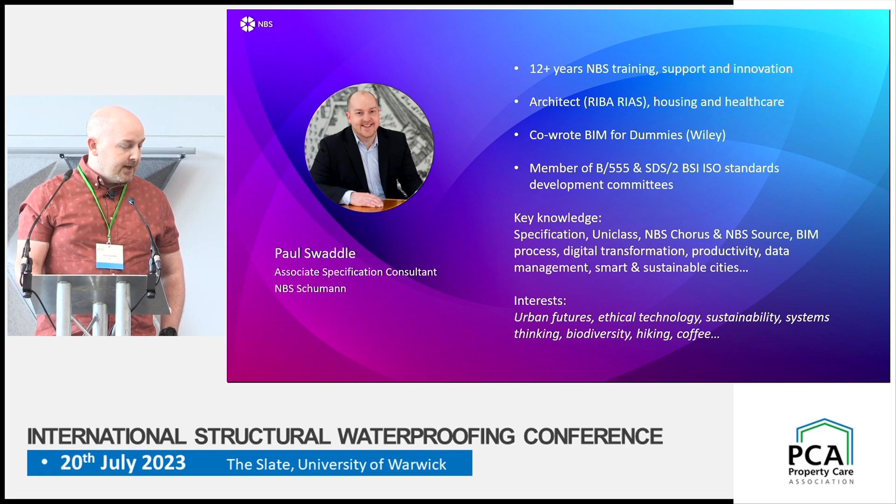It's funny being talked about as an authority or an expert on anything - I always think of it as experience. It's good to have lots of experience under your belt and lots of case studies that you can call on. Certainly not assuming that you know NBS. Oh, forgive me, there we go - certainly not assuming that you do know who NBS are.

We're a technology platform for the construction industry. Many of you will have used NBS specs in the past, J40, J10 type specs - they're created in NBS, but we provide platforms for thousands of users to find product data and specify buildings in all kinds of different ways. In terms of content, it's then access to standards and guidance, and we've got technical authors who work for us who are experts in their field. Recently, we became part of a Swedish headquartered group called Byggfakta, which gives us the scope and resources to develop Uniclass and NBS and continue to invest in those pieces of work.

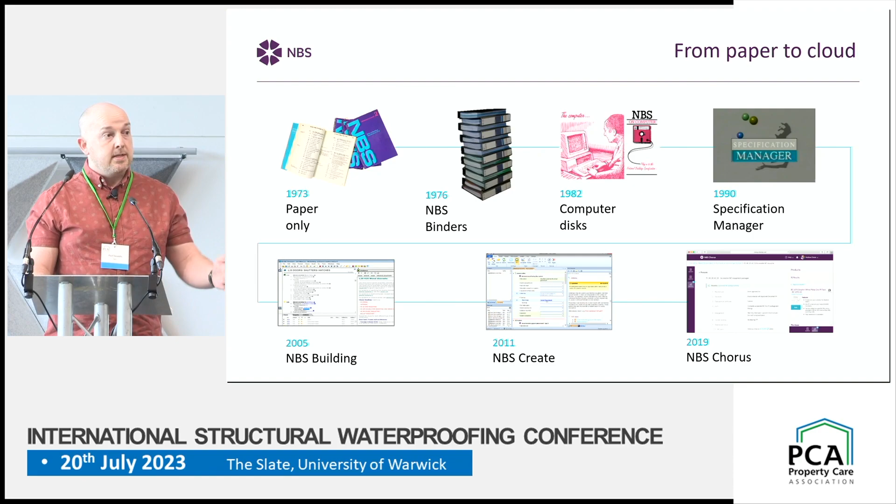So it's our 50-year anniversary. Back in 1973, NBS was first produced as a paper document, and everything since then really has been a technological evolution, responding to photocopiers, desktop computing, web technologies, and now into the cloud with NBS Chorus.

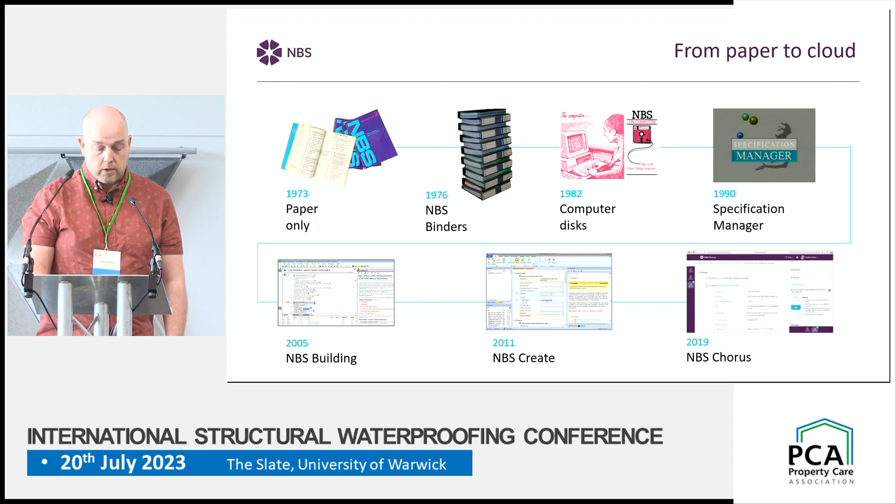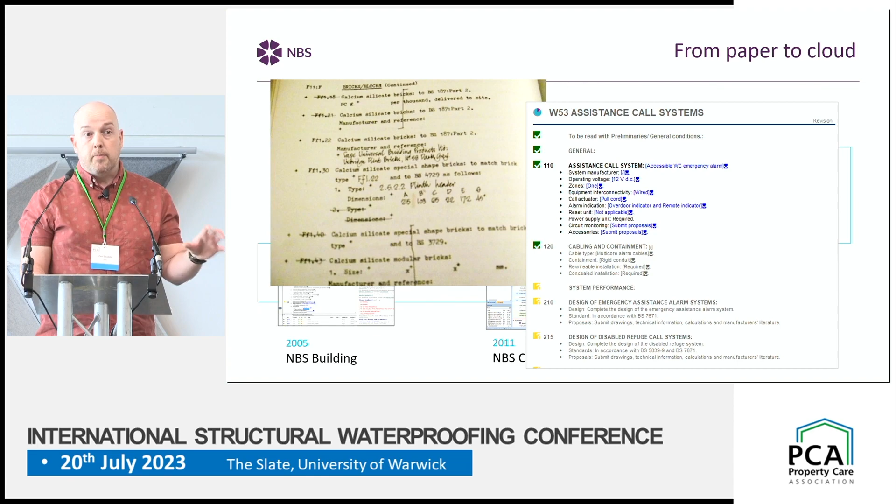But really, the fundamental concept of standard clauses that can be adapted for a project hasn't changed in 50 years. It's to fulfill a need, ensuring that people have access to a baseline where they can then adapt that for their projects. And rather than having to scribble on an old spec and retype that up or rekey it now, it's about

having that in a cloud-based solution where people can work together. So that's now in the cloud with NBS Chorus. And the key thing here is the ability to access other information that's relevant - that's guidance, that's standards, but it's also product information, information from suppliers and manufacturers of waterproofing solutions too.

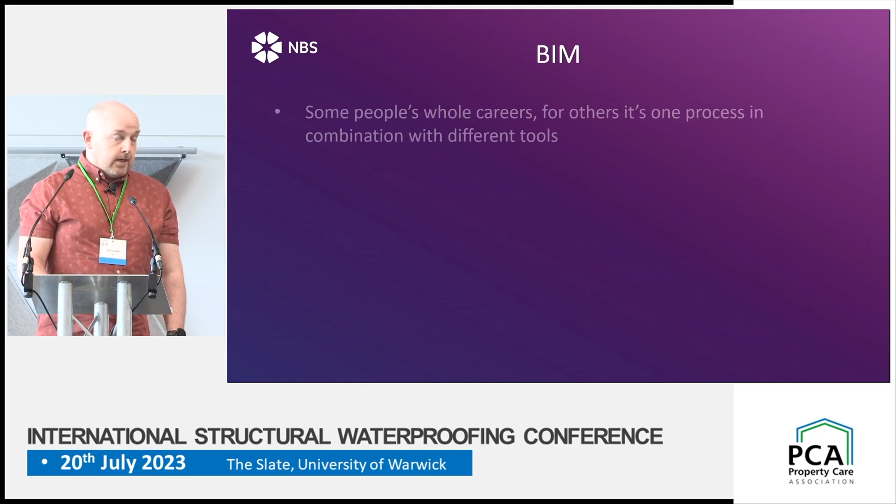So BIM is a buzzword that's been around now for 15, 20 years in the industry. In different ways, it's going to have been applied differently by many of you. I'm sure it generates some eye rolling and frustration in the audience as well. And I'm not just a BIM advocate with no self-awareness of that. But I think whatever concepts or images you have of BIM over the last 5 to 10 years, do be prepared to evolve them. The industry's maturing.

The people involved have 10 years of experience of these technologies under their belt and are wanting to apply this in much more logical and practical ways, working together with different parts of the industry. So some people are BIM managers, and that is their whole careers. For others, it's a process. It's a standard similar to any other standard that you're applying.

It is complex because it's trying to represent an entire built environment industry, but it's certainly not as complicated as some of the guidance might indicate that it is. And the reason for that is that it's data first. It tends to attract those people who are Excel spreadsheet wizards and Airtable and Notion wizards who want to catalog everything and classify everything. And so the processes can look very complicated.

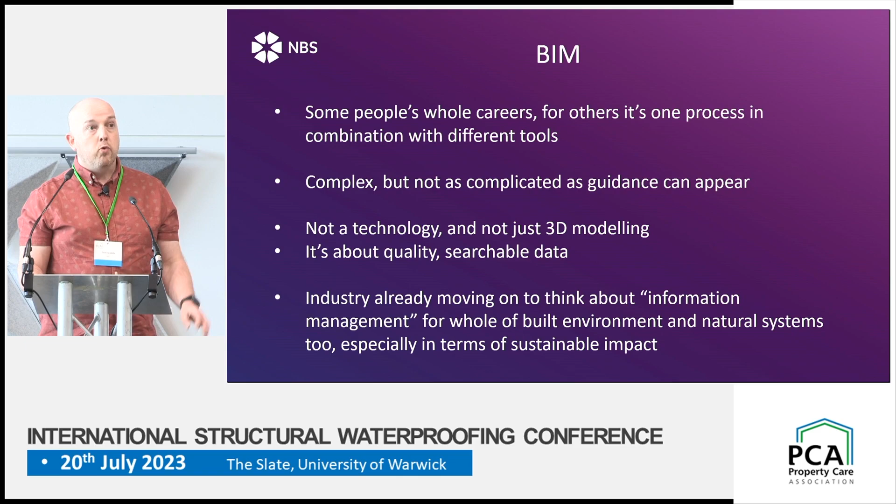But fundamentally, there's a real logic behind it. And I think already the industry is moving to a place of understanding that it's about sharing information. So there are different definitions of it for those who aren't familiar, not expecting everybody to be. Building information modeling was the first kind of acronym, but there are others you'll have heard too, building information management and better information management even.

But I think fundamentally the acronym is less important now. And this is my definition - certainly not an official one by any means. It's helpful, I think, in terms of simplifying it. It's a standardized process for managing information and for sharing it. And I think that's helpful because it gets us away from that idea that it's about visuals and 3D models alone. It's really about sharing quality data and providing the most up-to-date version of that for whatever the industry does. It's for management, and just like every manager, there are good and bad ones.

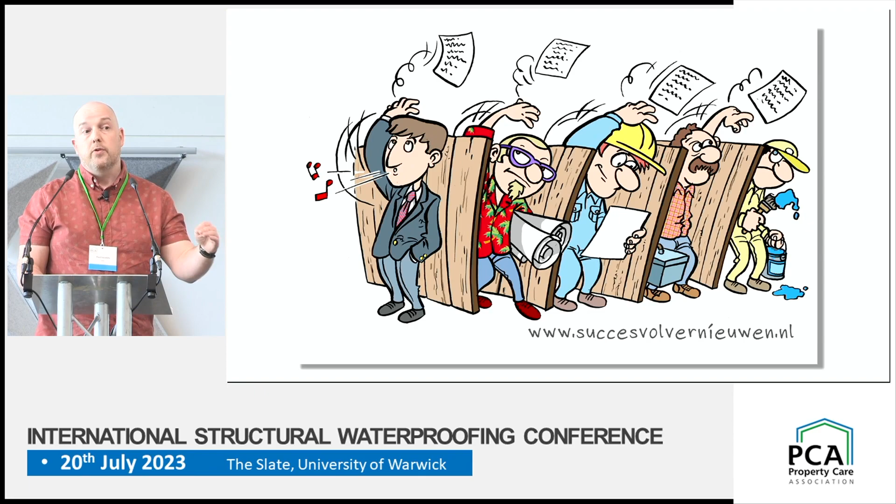And there's a few things to highlight in that drawing - not all of the information is getting shared, so they're holding on to something that feels sort of like this is our IP. There's no communication happening, it's all happening just being thrown over the wall. And it also demonstrates a lack of diversity in our industry, which I think is being picked up on as well. But it's that lack of communication and lack of a linear process of who's responsible for which piece of data and how it gets shared.

The other thing is that the nature of waterproofing, I think, really applies well in terms of some of these technologies and processes. Trying to do a blanket process across the whole built environment is always going to be tricky. But structural waterproofing in particular has benefits in terms of - it's obviously a lot of subterranean work, it's a lot of groundwork. And this example from Farringdon is about manipulating the data to understand how the London Underground would be affected, how local piles and structures would be affected as a result of new development.

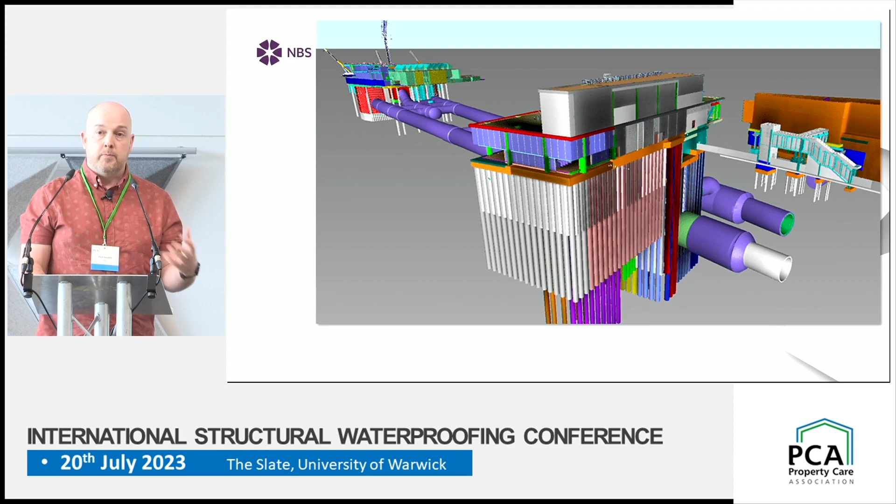And having that context of where all of those clashes would take place helps everybody to be on the same page at the earliest opportunity. Similarly, this one from Plowman Craven is of underground works and understanding what actually exists below the surface level.

But it's not just about those visuals. Yes, they're really helpful in terms of coordinating when we need to work on those, but it's the data that's underneath. Click on one of those, it's an electrical cable - who installed it, when was it installed, when was it last maintained, what does it connect to. And having all of that data in place is key to these parts of the industry.

So, in terms of why it's important, why should you care? What are the benefits? Some of you may be suppliers who have invested in BIM objects and developing information specifically to those processes, and are thinking about return on investment, thinking about the benefits. So I am keen to provide some case studies and examples and some real quotes from specifiers that help to, I think, indicate a real value to the type of work that is being done.

Within the Chorus platform itself, within specification, having access to product data is integral to people being able to specify. We hear time and time again that if the data is there, specifiers are more likely to use it. And we know from the statistics and analytics that we get from behind the scenes that it tends to be, when it's applied early, substitution is often reduced as well. So having that information present helps specifiers to make those decisions.

And that's just on the specification side before we even get into some of the really detailed product data. It also demonstrates that you're thinking about the things that are important to them: performance, quality, material properties, sustainability, and that all of those credentials are taken care of within the information.

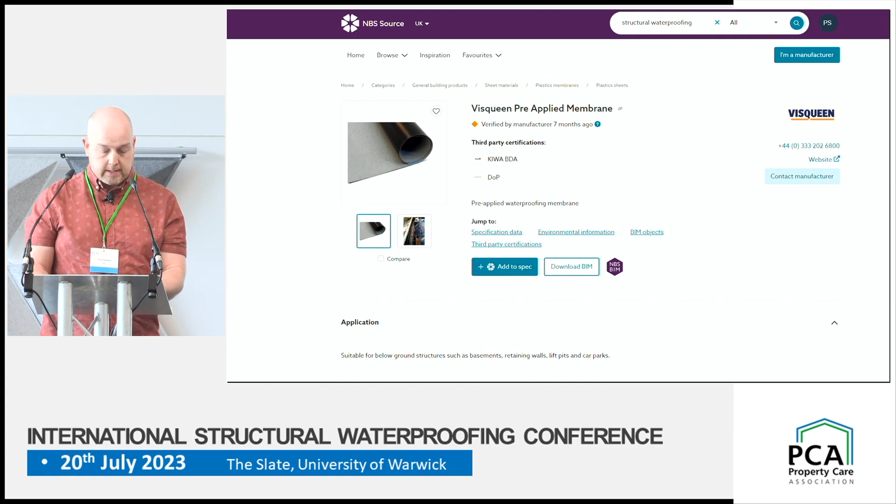In terms of the 3D objects themselves, this is a Newton example, and the quality of the 3D information is fantastic across so many of the suppliers within this industry. Because it's about being able to demonstrate those interfaces and showing how these things actually will be applied in the real world, and the connections that need to happen between them.

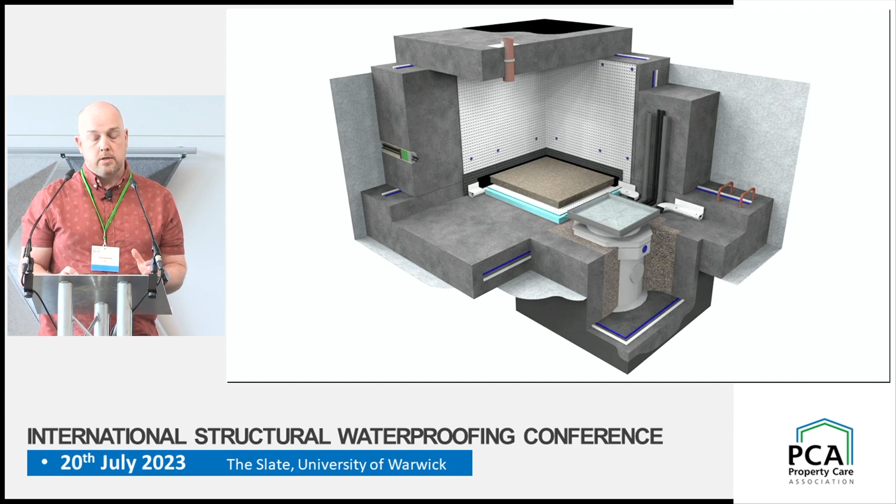So having that understanding allows architects and engineers to get in really early and understand how these systems are going to be used. And equally, many of you will say, oh, we're only ever a 2D drawing, we're only ever a line on that drawing. And that is true too. There are some really brilliant details and information that users can take to apply to their projects as well.

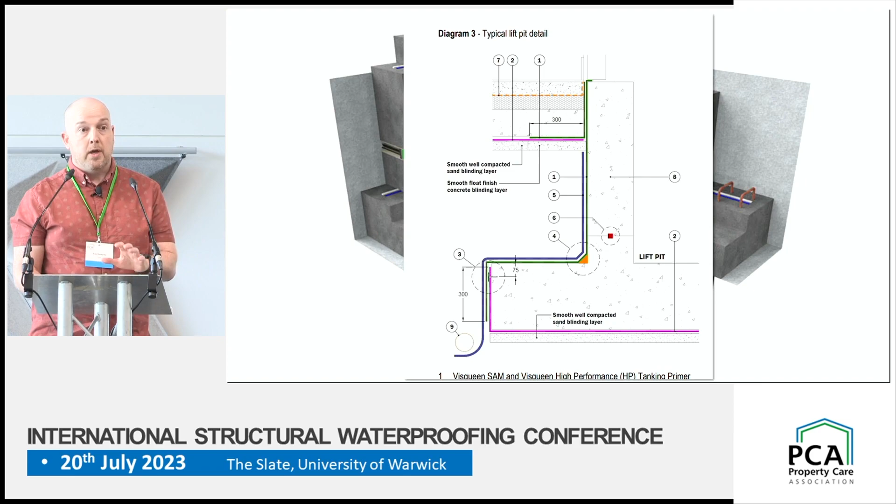For those who are saying, we're never going to be modeled, we're a coating or a render or a thin layer, and people don't model that stuff—I think it's getting away from that idea that it is a purely visual aspect. Yes, having that line on the drawing, having that thickness is going to be important. But actually it's the data behind the scenes.

Within that square of the object that's actually downloaded is a huge amount of properties: thermal conductivity, compressive strength, permeability, its weight, its warranty. All of that property can be embedded within that object. But then also there's a link to that specification clause.

So within that object, automatically the user is getting access to that specification, where you can add in all of that detail that's required alongside the particular object that's been used. And again, that idea of embedding it early, getting into the project and reducing substitution that happens.

So within some of those examples, we're beginning to see a lot more about EPDs. That's come up a couple of times this morning. We're hearing directly from architects and engineers that access to EPD certificate information is really important. And even if you're showing a demonstration of having an embodied carbon figure, developing that information over time is going to be so much more valuable in the next 3 to 5 years as well.

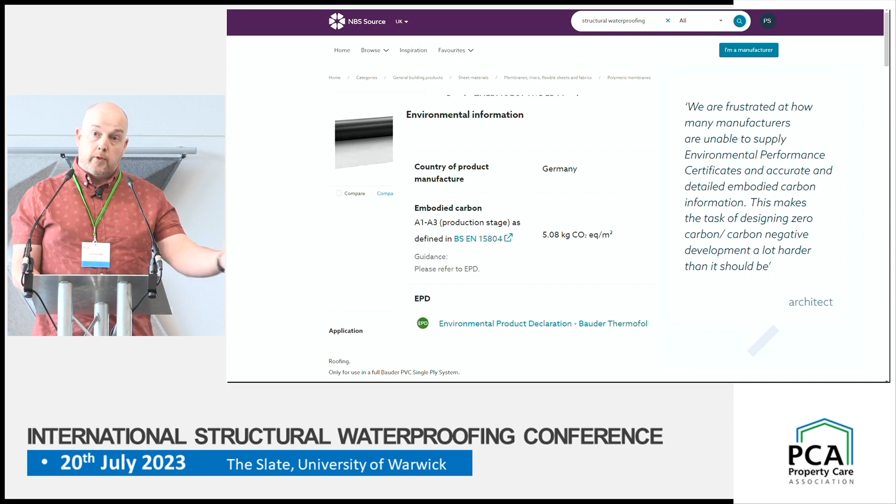But increasingly, we could say that about fire as well. You know, the Building Safety Act, the golden thread of information—demonstrating that you are thinking about the same things that they are, and that you're providing that information for them, is incredibly important.

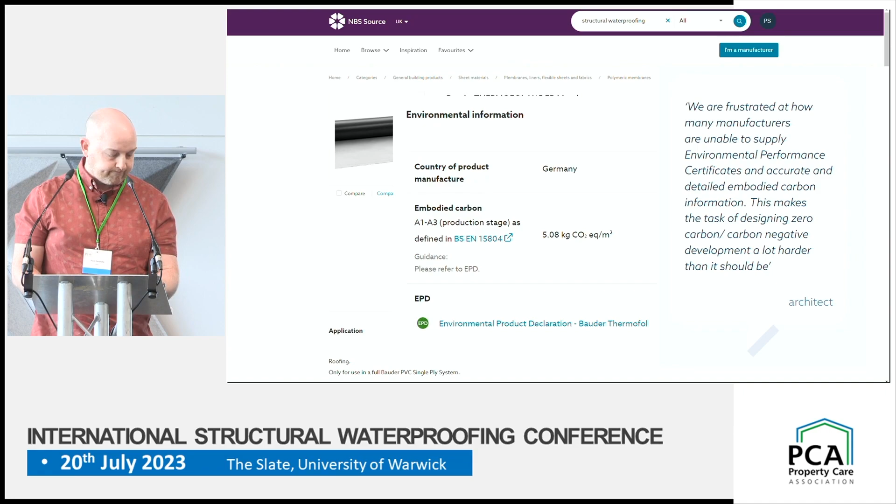So we've got a few examples from the survey that we did. This one in particular is about how often information is then verified to show that it's actually met the performance that's required. And all of this data can be found within the survey itself. But basically, the product that was actually installed is the one that was specified—how often does that take place? We know how important that is as a result of things that have led to the Building Safety Act. So you can begin to see exactly what's happening in industry and for our specifiers in particular.

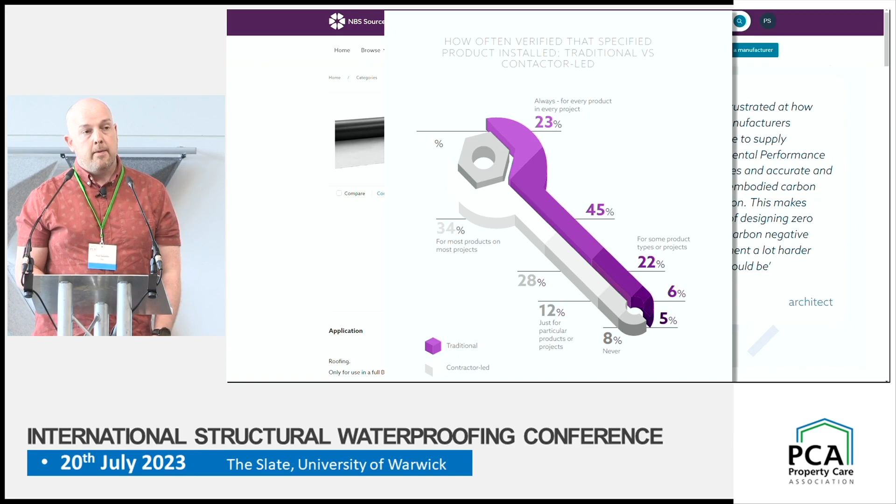So I've picked out a few case study examples and quotes of how BIM data is being used in real projects. I haven't been able to pick everybody as an example, so forgive me if suppliers in the room find they're not one of the examples I've used. But also how BIM data is being used when we think about it holistically—all the data, the digital information, the properties, and so on.

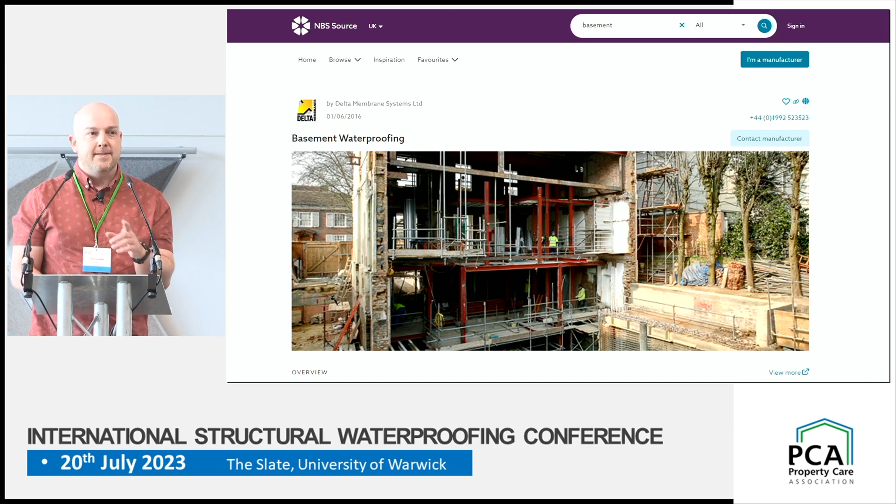This Delta example of a 7-meter basement, underground works, cavity drain membrane, and a swimming pool. One of the interesting things I was interested to find out this morning is it seems like about 10 years ago was the peak of that idea of iceberg mega basements, moving huge amounts of excavation to create these things.

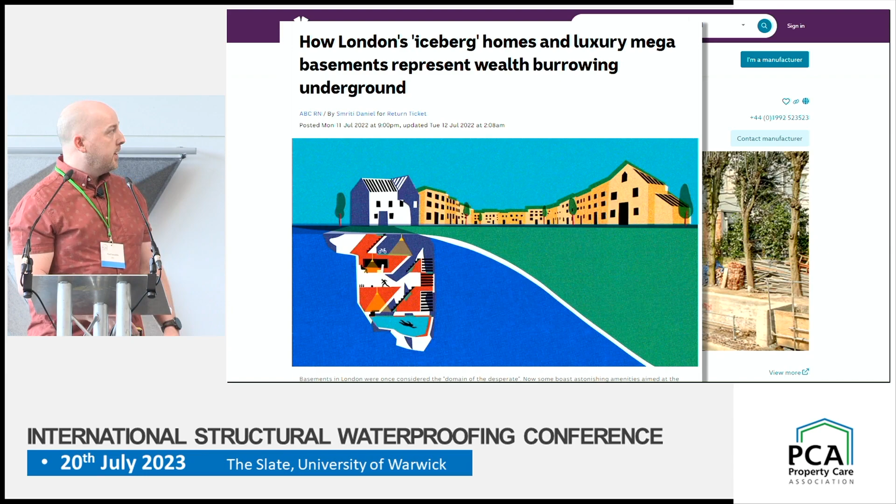But increasingly we're seeing a move towards understanding the importance and the integrity of structural waterproofing as part of all kinds of different developments. For this Delta one, when I saw the images on this case study, I think they're extraordinary. This one almost looks like two photos stuck together—the quality is so good.

But this also indicates remedial work for a failed previous system that had been installed, and the fact that that's also part of the work. So if you do have examples like that, case studies where you've done work that's noteworthy, ensure they are part of your product information, because it really does help specifiers to find and use your products.

In terms of the product information itself, we hear from specifiers that manufacturers need to provide us with BIM objects, and that they're actively seeking to look for those. When we talked about the priority order of those, over a third said they were the most important thing for them as a designer—that's compared to brochures and product data sheets and other things.

Product data sheets still dominate, of course. People are just looking for the technical information. But over a third were starting from the point of view of the model and that information.

This is Newcastle, where I'm from and where NBS are based. This is a PUDLO example. I say I'm an architect by background—similar to specification, which tends not to be taught much in universities, structural waterproofing certainly isn't part of the majority of architecture courses. So I already feel like I've learned so much, even just in terms of preparation for this, understanding the different technologies and options available to organizations.

In this case, the PUDLO example was used because the contractor and the supplier got together early, pre-contract, working out how these things are going to work on site. There were health and safety issues—the height of the slab creating working-from-height issues that meant a waterproofing concrete was a good solution.

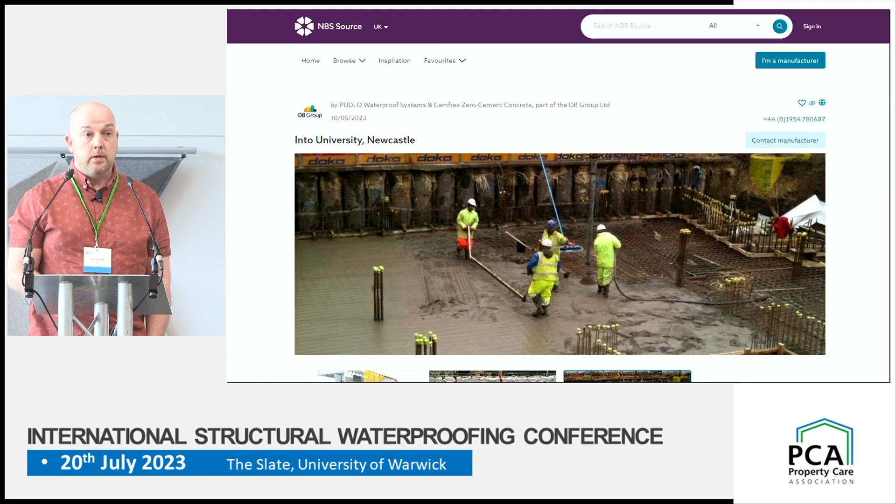Also material storage—a very tight city centre site meant it was impossible to have a place to lift and store materials. So the waterproofing concrete became the example that gets used. And having that data in place on something like NBS Source means organizations can find it.

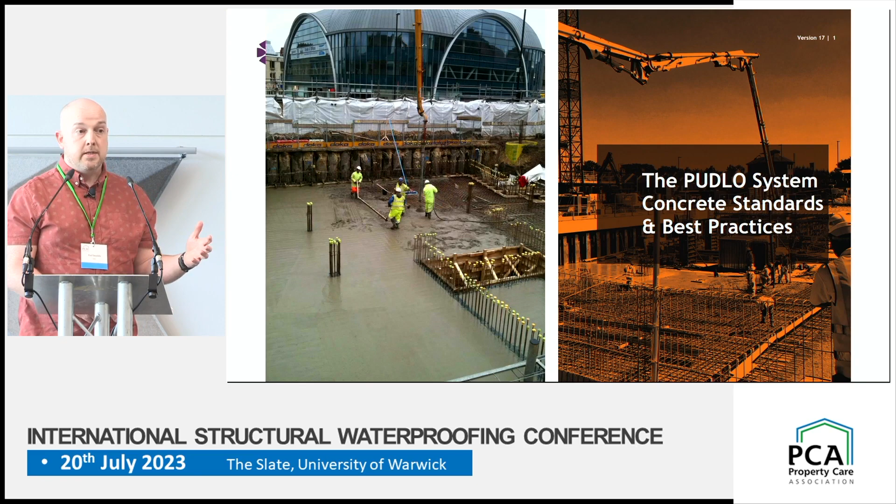So it's not just about product data, but having things like standards and best practice guides, and being able to market and advertise using the technologies within there. Along with that, we understand health and safety, COSHH requirements, and sustainability are going to be increasingly important. So even though you may have all the technical requirements like compressive strength and permeability, understanding how this works in the context of sustainability, fire strategies, and so on is going to be integral.

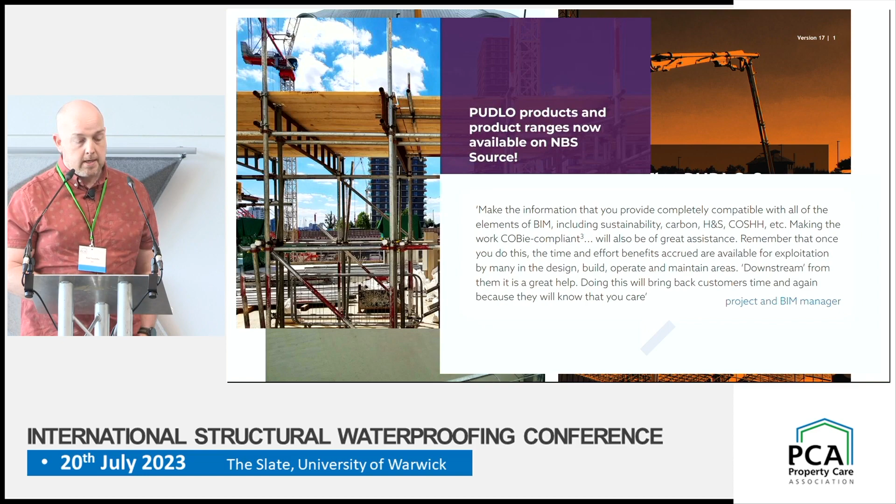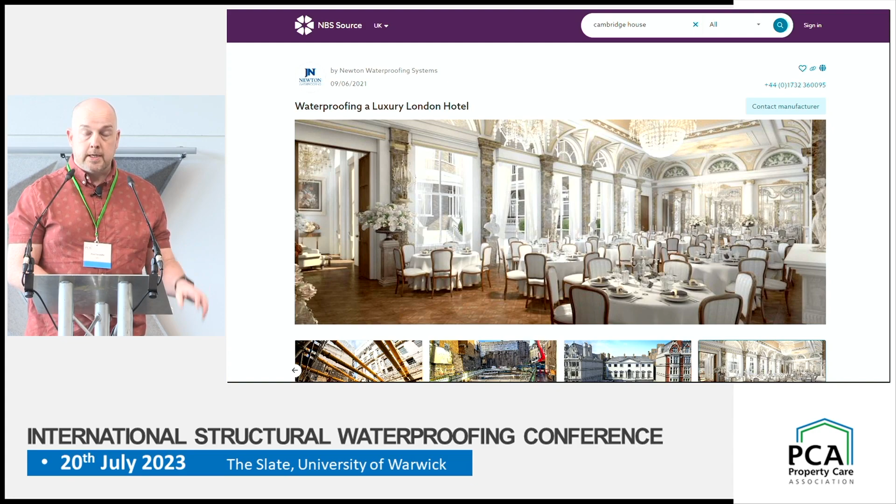And we hear that from BIM managers now. I've been meaning to go see this project in London, Cambridge House Hotel. This is a Newton example, a brilliant case study, and the renders from PDP Architects, I think it is, are absolutely incredible for this. But it's those facade retention and extraordinary amount of subterranean work—I think 4 levels or something—with this particular project.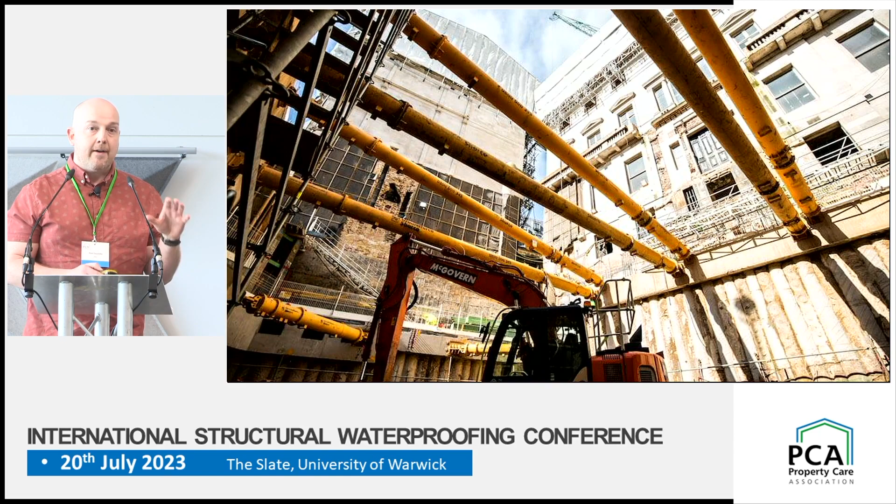But having that 3D information early, we hear that over two-thirds use our digital objects. So even though we know 90% of organizations are using product data sheets, we've got two-thirds using the digital content. So really important to appreciate how these are being used.

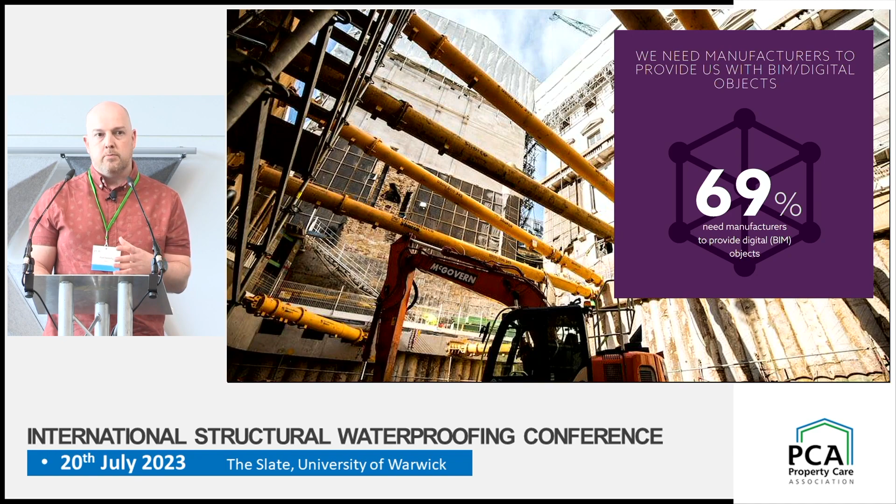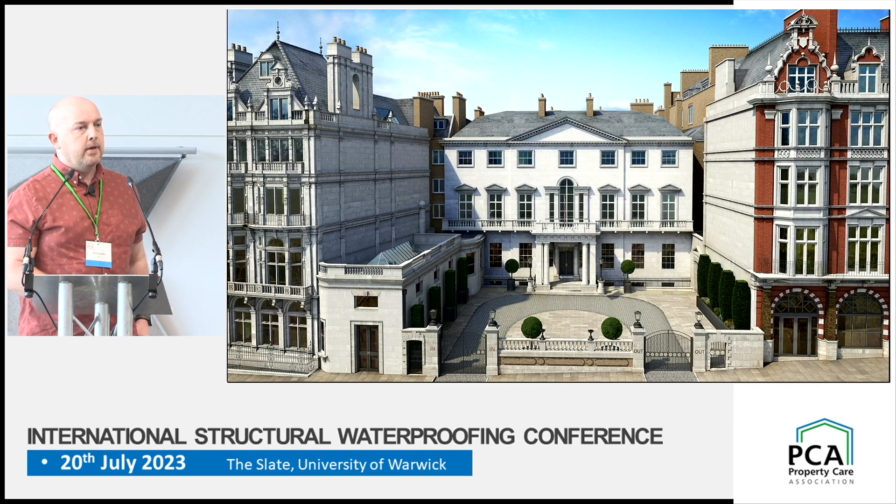But I think it's that context of—you're not just a line on a drawing, you're not just a layer that's not going to get modeled. Having the data in place really does help with specification and development. And this is one of the renders of the project that it's going to be—it used to be the In and Out Club in London and is now becoming a huge luxury hotel.

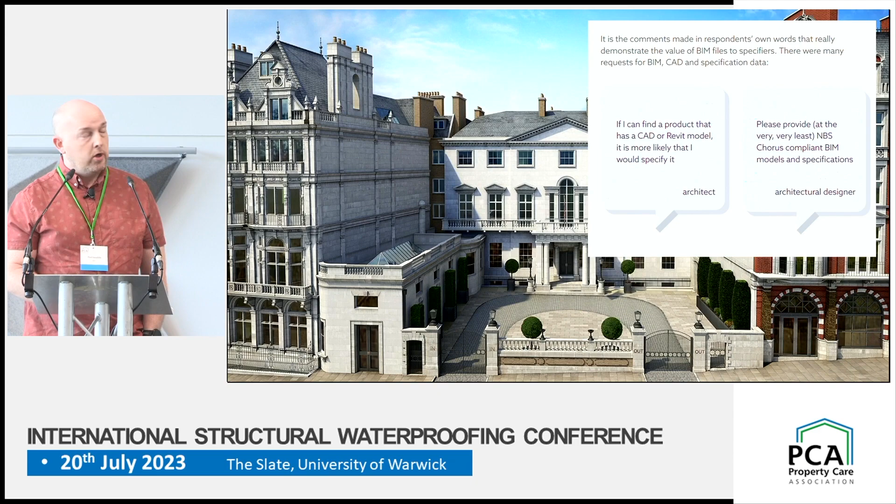But again, quotes directly from architects involved: 'If I find a product that has a model, I'm more likely to use it,' and also, at the very least, have ones that link to Chorus specifications, so we can pull that clause directly into our spec early on. Slightly different example from Fosroc in terms of they advertise their ability to work on specifications with organizations.

We know that for complex systems, of which structural waterproofing is absolutely one, within that survey about a third are working with information themselves and have enough to do the spec as best they can. About a third are working directly with a subcontractor, and about a third are looking for that technical authoring, technical advisory role where you're actually coordinating that specification at work.

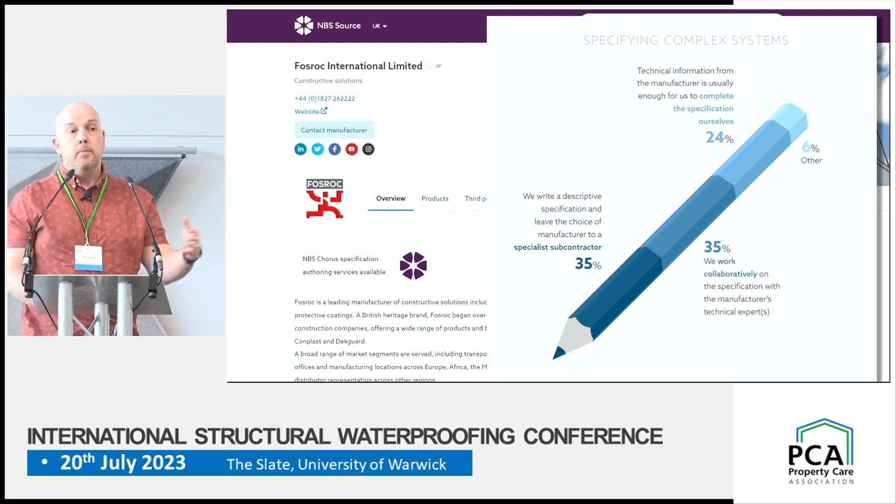And we are able now in the platform to provide you access to just a limited part. They can revoke it at any time, but it means that you can provide that expertise directly on those projects. So that can be really useful.

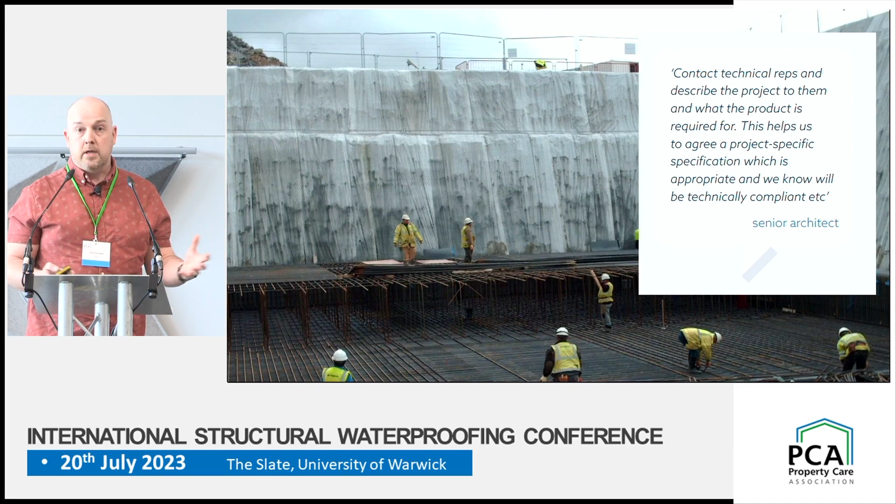As an example of where that's been utilised, this is Ardley Energy from Waste Plant, over a 12-metre drop, artesian well, so extreme pressures, chemical salt issues to deal with in terms of the chemical barrier, and understanding all of those aspects means that they can begin to think about the project-specific specification, working with technical advisory and the expertise that you have inherently as part of your role.

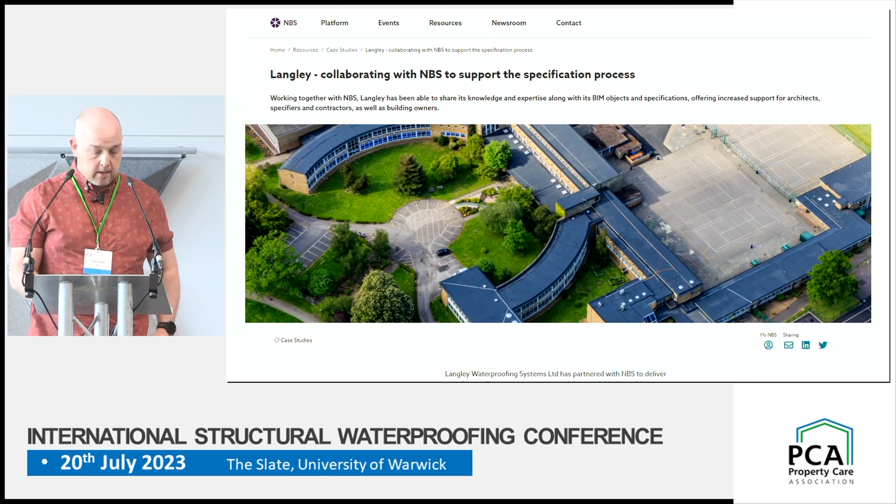If there are case studies and examples of particularly unique specifications or projects that you've worked on, it's really worthwhile embedding them in, as they're more likely to provide the kind of data our customers are looking for. All of those quotes and statistics are available through this recent survey, What Specifiers Want, which came out this year and is valuable in terms of understanding the context: a third of people are looking for that technical advisory, and a number of people are working to use your data and to have access to things like EPDs and so on.

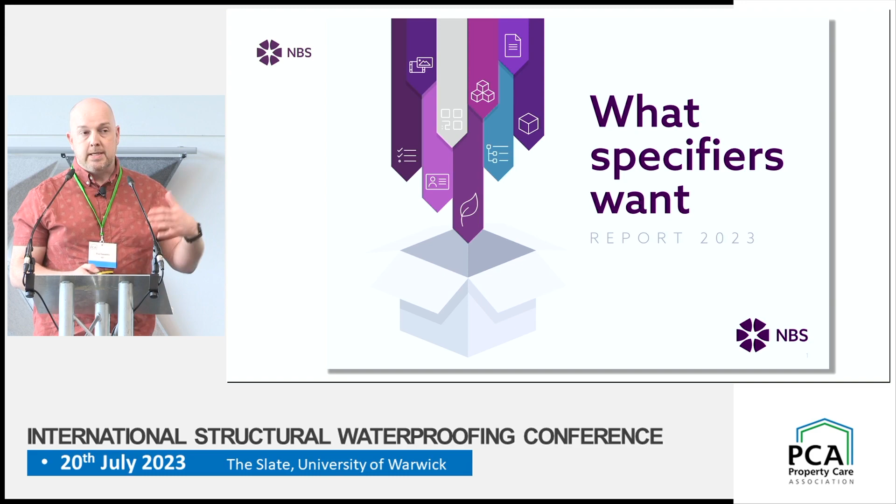So as a bit of a recap in terms of the platforms, NBS Source is about being able to select product data and work with manufacturer information directly. We've worked on moving this to the cloud, particularly in terms of search, making sure that whatever term people are searching for, they find the information you provide, but also in terms of comparison.

One of the things that you might do when searching for a piece of technology, like on the John Lewis website or Currys website, is being able to compare things like for like. The same is true of product information now: show me all of the compressive strength, show me all of the permeability, and let me see which values compare. Being able to do that with the data requires us to structure it in a consistent way.

We work with suppliers to ensure that their data is structured consistently and can then be applied directly to the spec. Anyone who's been working in the industry for over a decade will know some of the legacy products we had: RIBA Product Selector, NBS Plus, which was the specification link, and the National BIM Library, which was the beginning of our BIM object journey. All of those have now been grouped and subsumed into NBS Source.

So that's now the one-stop home for all of that data and a really simple place for specifiers to go to. The benefit of that from a supplier perspective is that they're able to manage ranges themselves. So once that information is live, if things change in the ranges, if things change in terms of technical information, or you do get that EPD certificate for a product you've been asking for a while, you can update that information yourself.

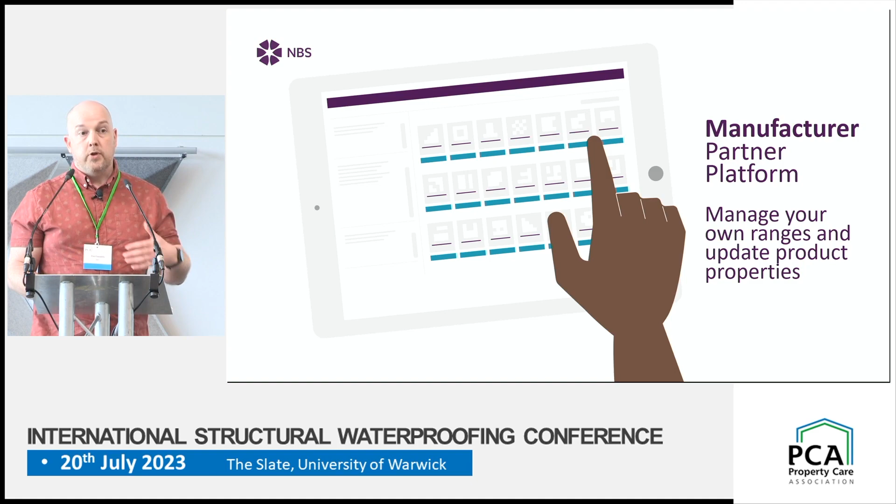So you're not having to wait and be limited to some of the information that's there, you can manage that type of information. The more up to date it is, the more likely it is to be used, and you can see that verification process in the product.

And then if you're interested in liaison with architects and engineers and actually working directly on specifications, you can use NBS Chorus, with access to those projects where people give permission for you to be part of it, and the ability to work directly on project information. That control is in the designer's hands, so they can just give you access to the bits that are relevant, the green roof, the structural waterproofing, and so on.

I talked earlier about the fact that architects and engineers will have varying levels of understanding about structural waterproofing, from a very basic appreciation of different systems that are available, requiring your expertise and requiring that knowledge to make it actually work in practice.